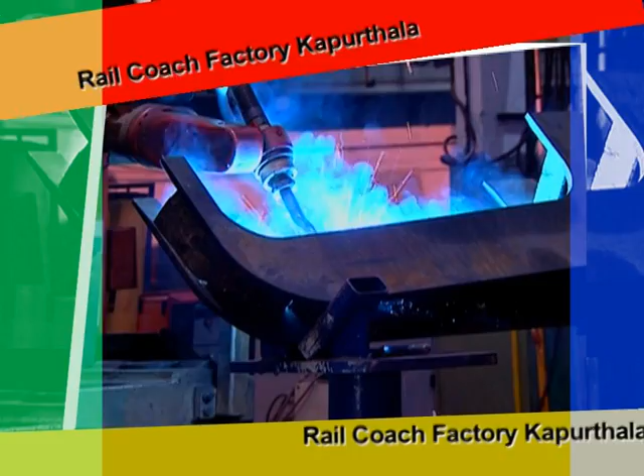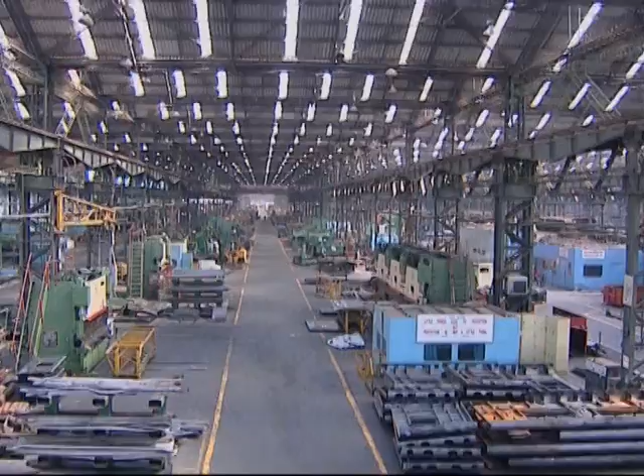This is Rail Coach Factory, a production unit of Indian Railways with the capacity to manufacture 1,500 coaches of various types every year. The factory, with its township, sprawls in 1,200 acres of land, full of flowers and greenery all around at Kapurthala in Punjab.

It was set up in 1986 with the objective of meeting the ever-increasing demand for rail transportation in India and to provide employment opportunities in this industrially backward area. Besides that, Indian Railways intended to upgrade its technology to contemporary world standards.

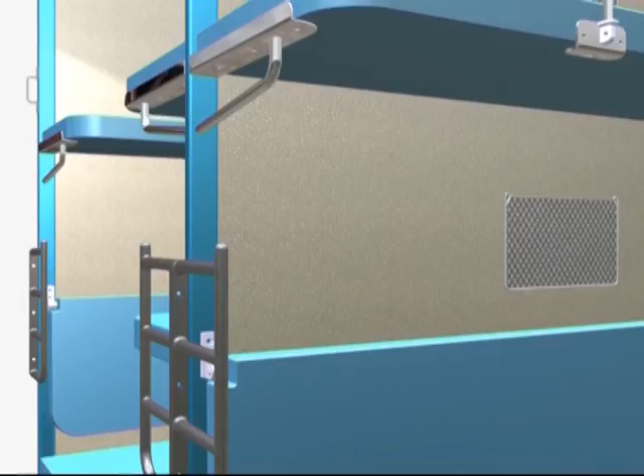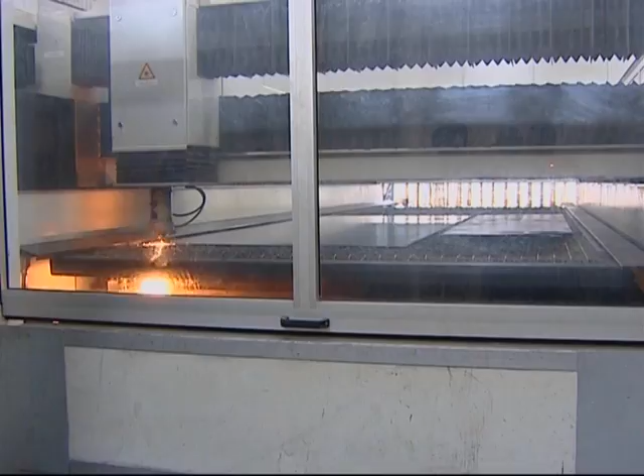For this, Indian Railways entered into a contract with Alstom LHB Germany. Rail Coach Factory had undertaken the task of developing and manufacturing modern high-speed railway carriages under this agreement, which envisaged transfer of technology in design, manufacture and maintenance engineering. As a result of world-class technology, Rail Coach Factory has transformed Indian Railways by introducing modern, high-speed, lightweight coaches.

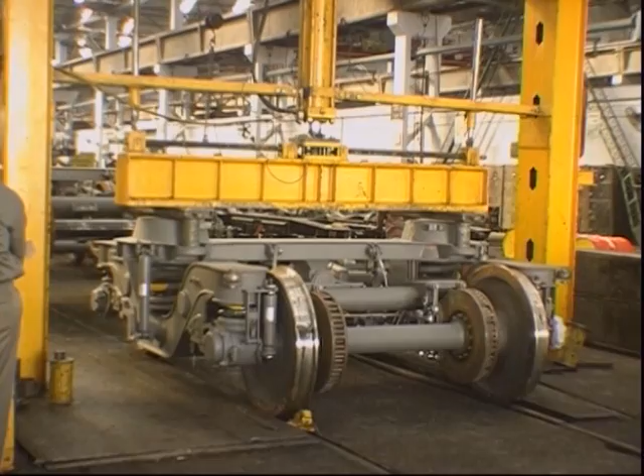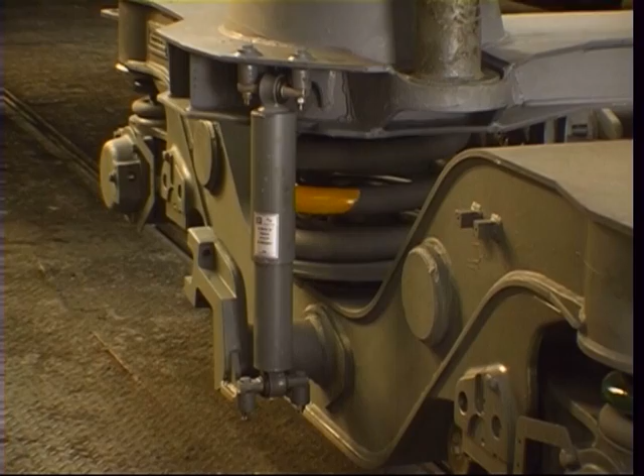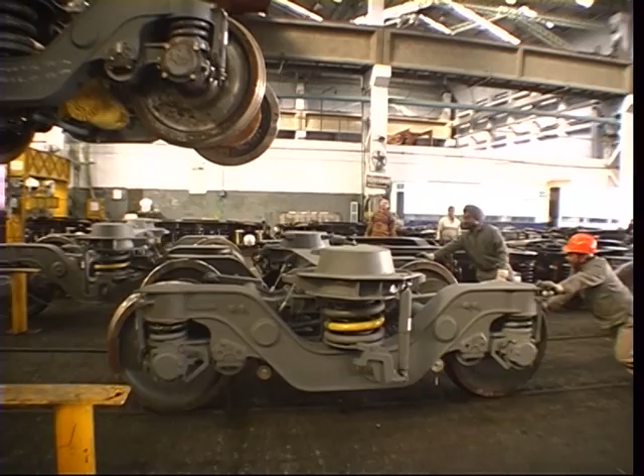Bogie design is key to high speed and ride comfort of coaches. Bogies of Fiat design from Switzerland are now being manufactured at Rail Coach Factory. These have been designed for a test speed of 180 km per hour and can be upgraded for a speed of 200 km with minor modifications. Rail Coach Factory now has capabilities to make Eurofima-designed bogies as per international standards.

The new design coaches are being used for high-end Rajdhani and Shatabdi trains of Indian Railways. The attractive and appealing exterior design sets new standards.

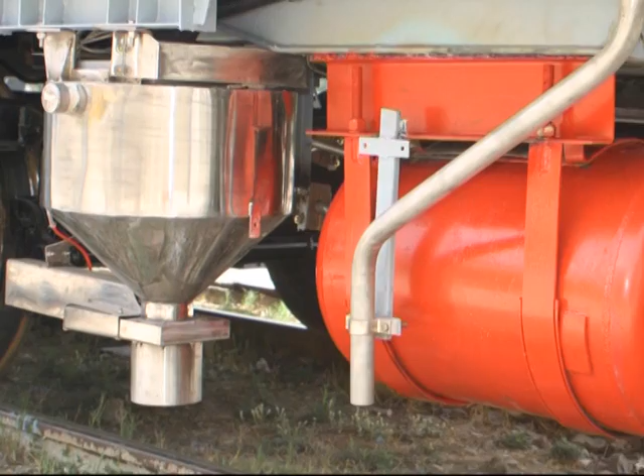Rajdhani trains are provided with air-conditioned first-class, 2-tier sleeper, 3-tier sleeper, hot buffet coach and generator cars, whereas Shatabdi trains have chair car configuration. Superior features of these coaches are higher carrying capacity, reduction in weight, higher speed, superior ride quality, sound insulation, AC humidity control, and a controlled discharge toilet system which opens up only when the trains pick up a certain speed, so that tracks on stations remain clean.

Rail Coach Factory Kapurthala has a strong tradition of innovations and developing new products.

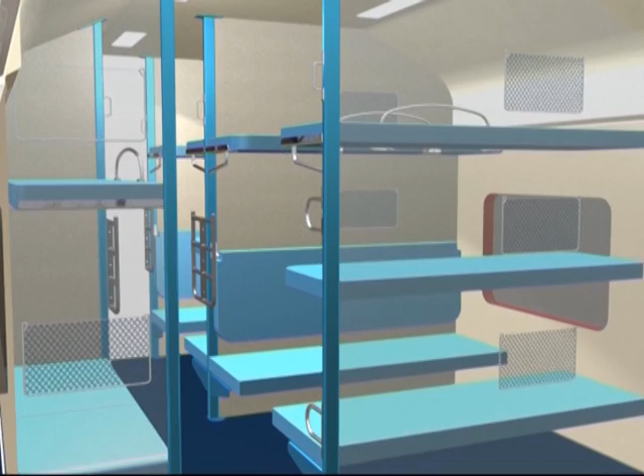Many new developments on coaching stock have taken place in Rail Coach Factory, such as AC 3-tier coaches for the benefit of long-distance passengers at a lower cost, and roof-mounted AC package units which are more efficient, reliable and easy to maintain. In order to bring AC travel within the reach of the common man, fully AC sleeper trains with higher capacity have been introduced, reducing the travel cost by another 40%.

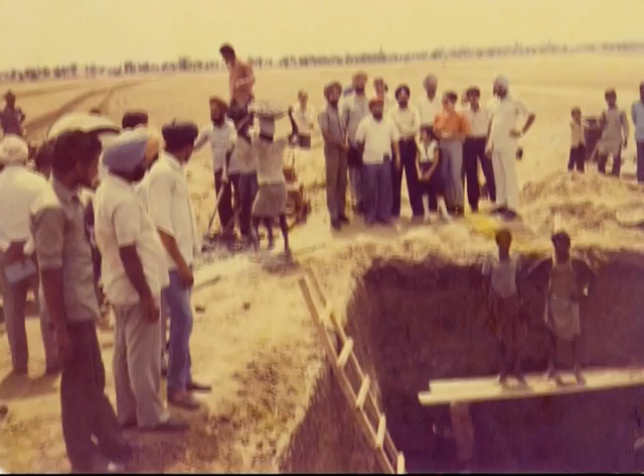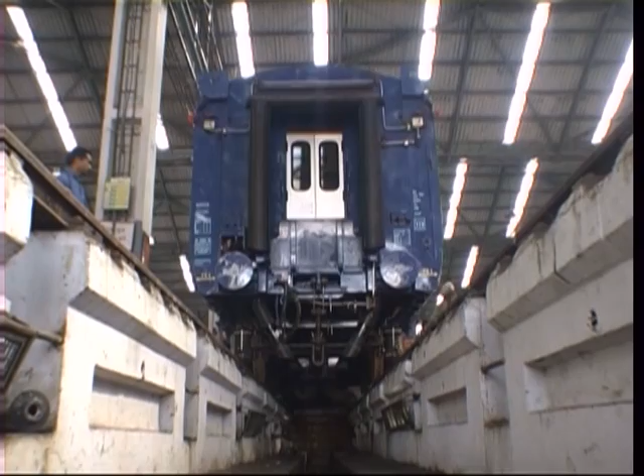The foundation stone for the coach factory at Kapurthala was laid on 17th August 1985. Within 2 years, manufacture of coaches started and the first coach was rolled out on 31st of March 1988. In 2 decades, Rail Coach Factory has made a niche in the industry and served the Indian Railways by meeting more than the desired objectives.

Half of the 40,000 coaches running on Indian Railways have been turned out from Rail Coach Factory, establishing it as one of the largest coach manufacturing units of the world.

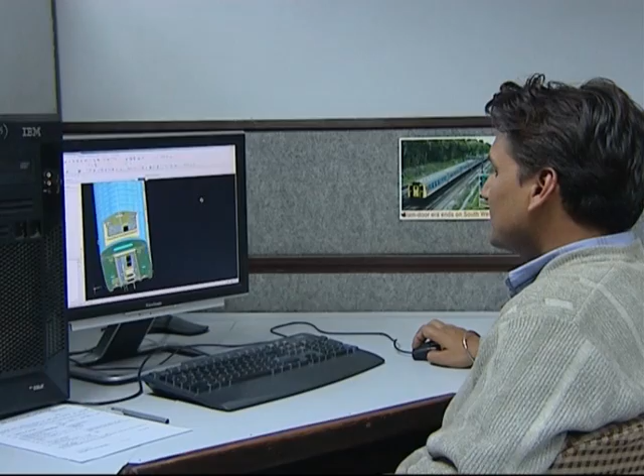The innovations at Rail Coach Factory are undertaken at the Advanced Computer Aided Design Center. Rail Coach Factory has developed into a center of excellence in design and development. The new designs undergo FEM analysis, study of vehicle dynamics, and lots of simulations before taking a physical shape.

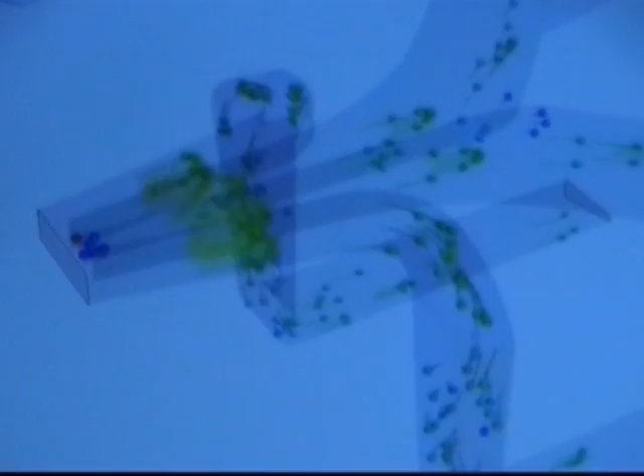Thrust is directed towards cost reduction, improvement in passenger amenities, comfort, safety of operations, and reliability of equipment. Aesthetics form an integral part of all new designs, which is perceived using advanced rendering software.

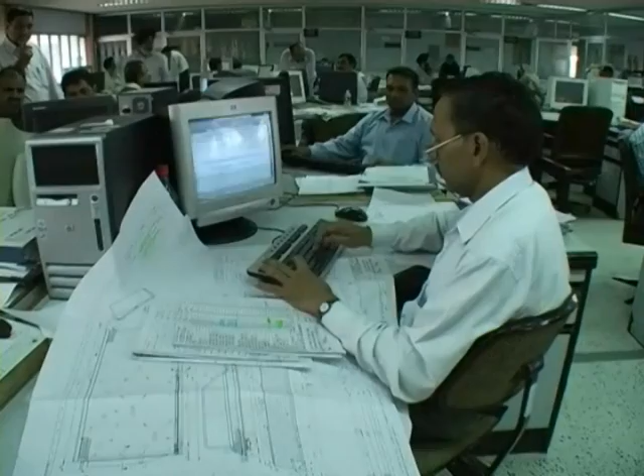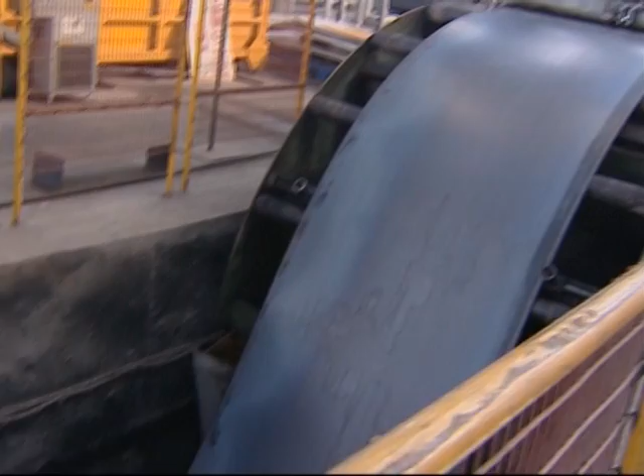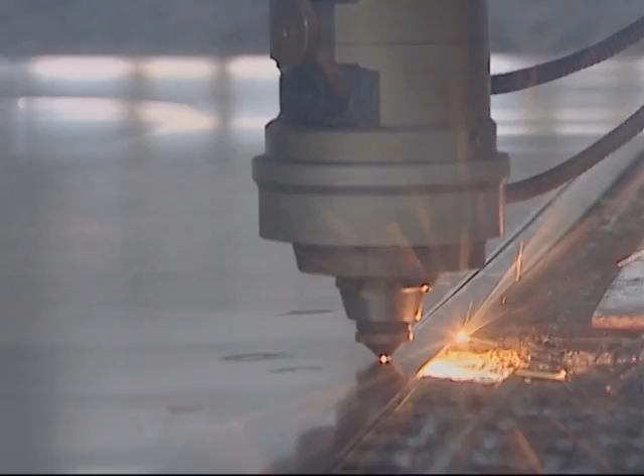After finalizing, the designs are sent for process planning and procurement of quality components. Raw material, which comes in the shape of coils, is converted into sheets on cut-to-length line and shearing center. The sheets are sent for profile cutting on laser and plasma profile cutting machines. 1,000-ton hydraulic presses and liner press brakes of various capacities are installed to manufacture window blanking, car line, etc.

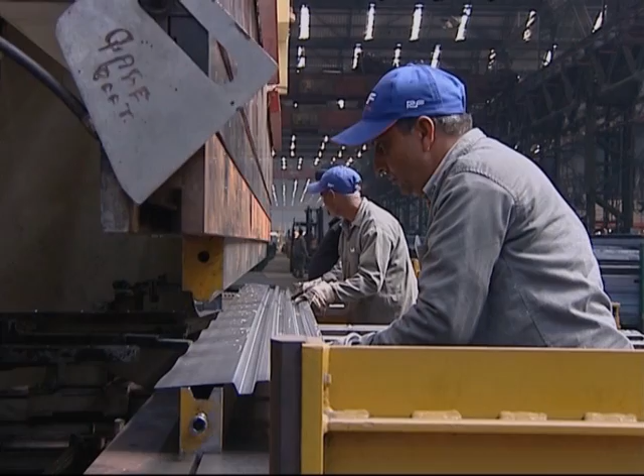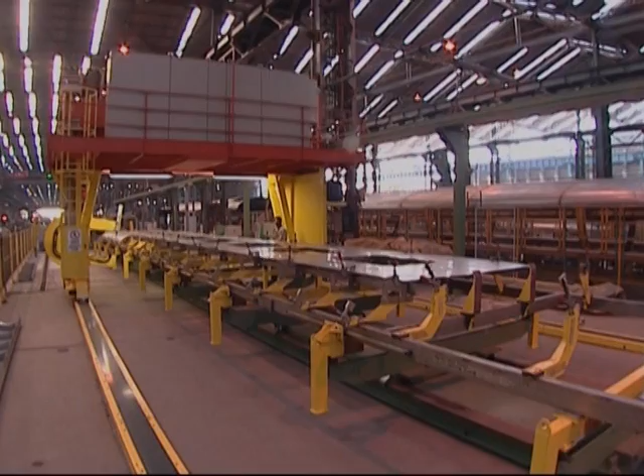Laser cutting and welding machines are used for manufacturing of side walls, followed by robotic spot welding.

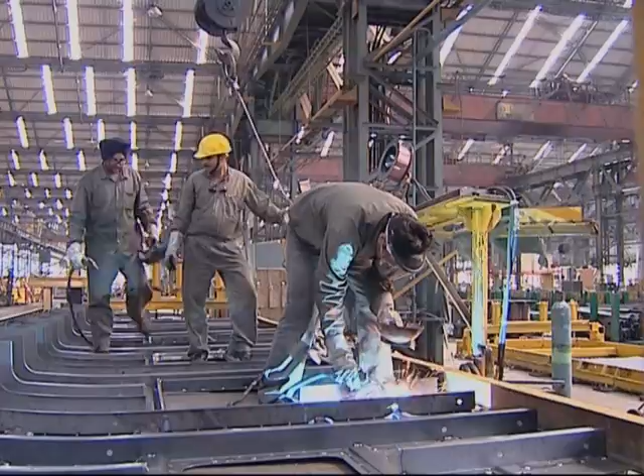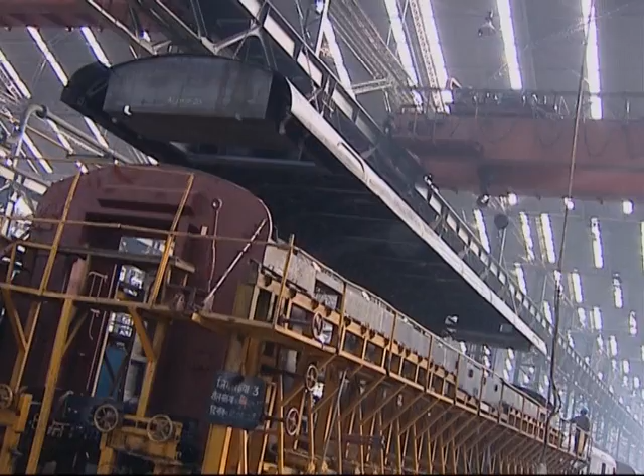The coach shell is assembled on the shell jig, and complete manufacture of the shell, right from raw material to coach shell, is under one roof, about one kilometer long.

The shells undergo a skin tensioning process to make the surface free of wrinkles before sending for painting. There is smooth and fast flow of the production process.

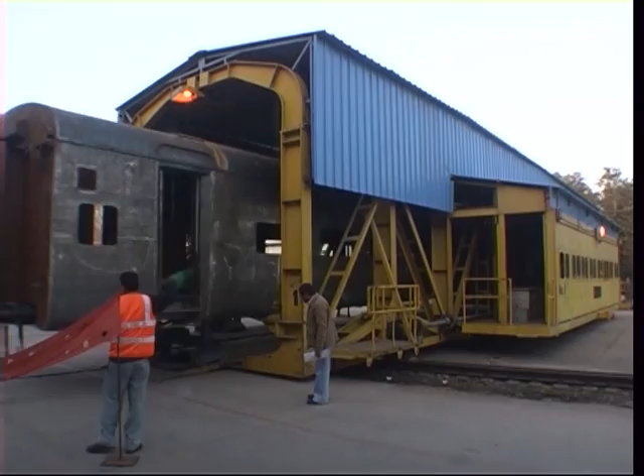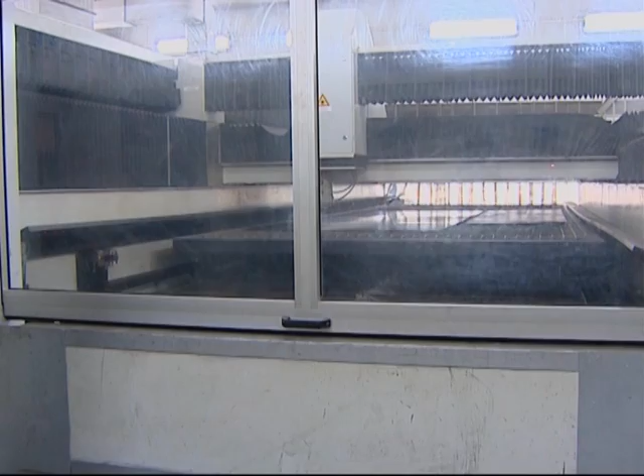Rail Coach Factory has a large machine shop with a number of CNC machining centers to carry out all types of sophisticated machining jobs required for components and assemblies.

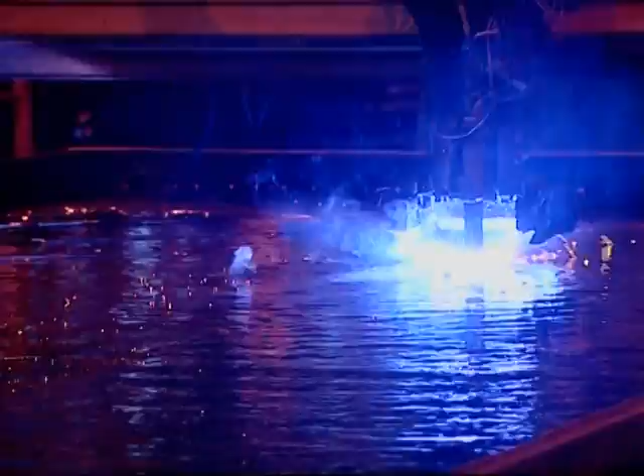Bogies are manufactured by using underwater plasma cutting machines and 6-axis robotic welding machines. Utmost safety precautions are taken and welding joints are tested by radiography to detect any flaw.

Bogies are also subjected to static load testing before fitment under a coach.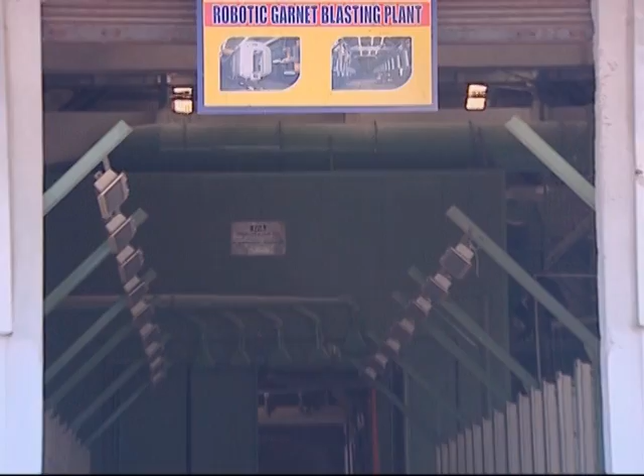The shell undergoes garnet blasting in a robotic plant for preparing them for quality painting. The cycle is completed in automated painting booths.

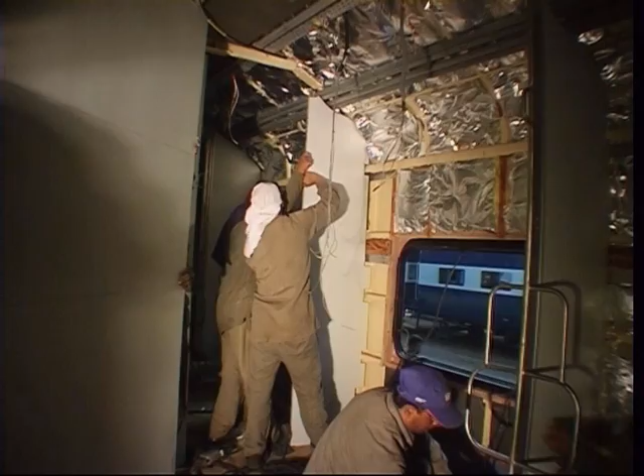A large pool of highly skilled manpower exists for all kinds of interior furnishing activities, where the coaches are furnished for all kinds of customer requirements.

All the inputs required for manufacturing the coaches undergo rigorous quality checks in its NABL accredited testing laboratory.

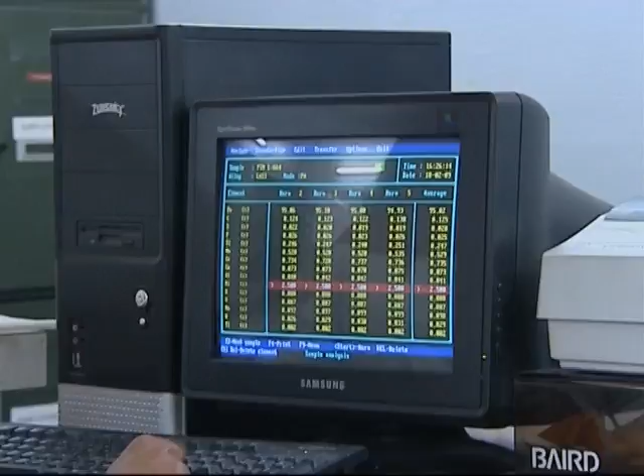The product undergoes different types of checks at different stages of manufacturing before its final testing. The final product is delivered to the customer duly certified on all the parameters.

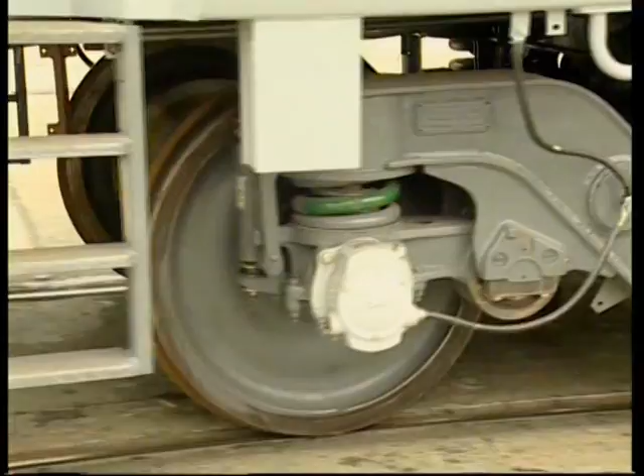Safety standards are given utmost importance and strict process control is exercised even for the suppliers of parts and sub-assemblies.

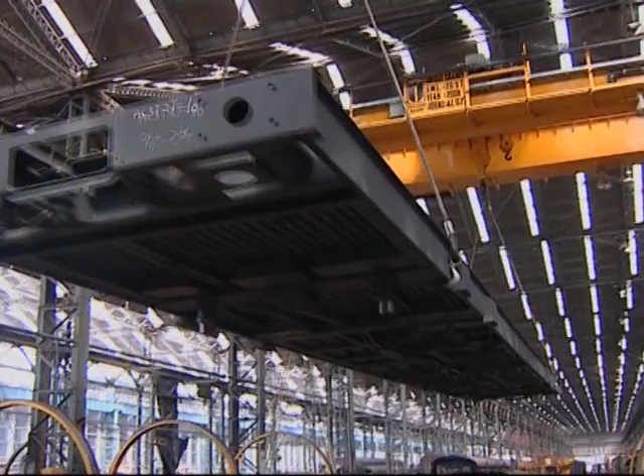Rail Coach Factory is committed to achieve excellence in design, development, manufacture, installation and commissioning of railway coaches with a view to ensure continued satisfaction at competitive costs.

Rail Coach Factory manufactures special purpose coaches as per customer requirement. The other variety of coaches manufactured by Rail Coach Factory are postal vans, high-capacity parcel vans, refrigerated vans, AC coaches for defense personnel, and many more.

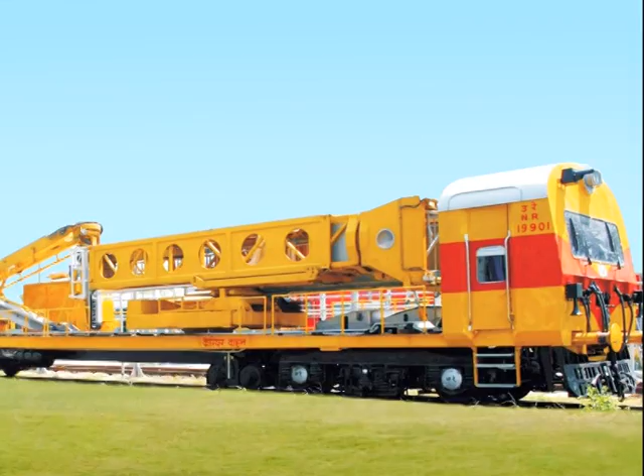Almost all coaches running in the prestigious Rajdhani and Shatabdi trains are Rail Coach Factory built and are a source of immense satisfaction to passengers.

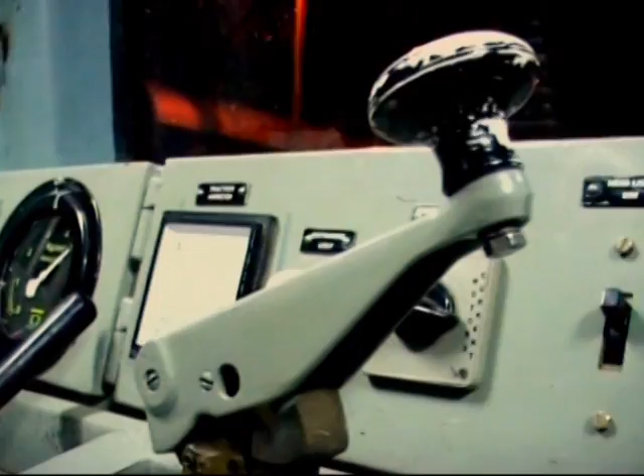Adding one more feather in its cap, Rail Coach Factory is the first one to manufacture the diesel multiple unit for meter gauge sections. Rail Coach Factory also manufactures meter gauge coaches for export, which are now running in many African and Asian countries. AC day coaches and AC sleeper coaches for Senegal, restaurant cars for Mali, chair cars for

Myanmar Railways. In addition, Rail Coach Factory has manufactured the world's largest exhibition train, furnished on different themes of science, in association with the Max Planck Society of Germany.

Kalka Shatabdi Express, I think, is one of the most comfortable journeys I feel. I travel very often up and down from Simla to Delhi, and I think even up to Kalka is very, very nice, very comfortable. And secondly, which I like most is now we are so used to it.

I find it more convenient than even air journey. I think it's very comfortable and the drive is also very good. So it's totally a good experience. The food, everything's good.

Very spacious, comfortable coach. The seats are very comfortable. It seems to be, because of the big windows, it seems to be very airy. Lots of light coming in. So definitely, the travelling is a much better experience vis-a-vis the other old coaches we were used to.

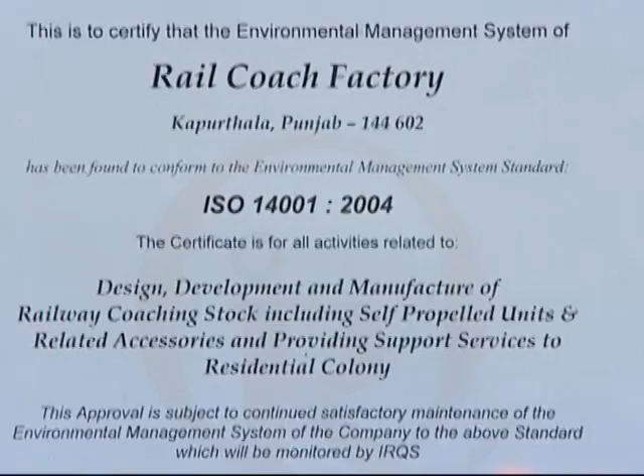Besides ISO 14001 certificate for environment management, Rail Coach Factory has been bestowed upon the Green Tech Environment Excellence Award and Golden Peacock Awards for eco-innovations in environment management through its products and processes.

Rail Coach Factory is really on the fast track. Within a short span, RCF has manufactured half of the coaches running on the Indian Railways.

RCF offers tailor-made solutions suited for any transport requirements across the globe. It has already executed various export orders for bogies, meter gauge coaches and meter gauge diesel multiple units.

Rail Coach Factory is meeting today's demands. Customers reposing their trust in RCF can be rest assured of getting the most contemporary, reliable and best value product.

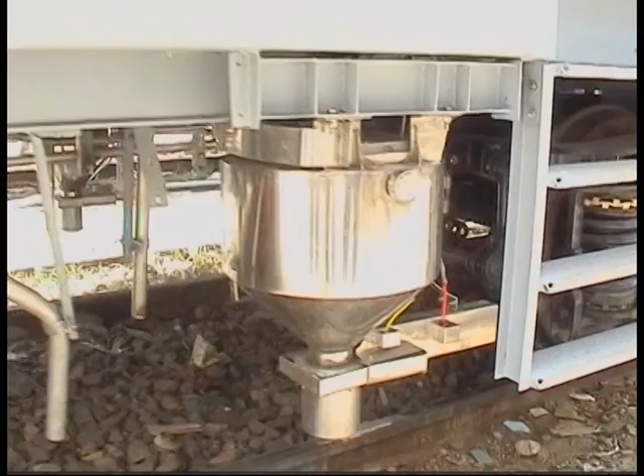It's not only futuristic, it believes in flexibility, safety and economy, and above all, the quality of its products. Rail Coach Factory will never belie your trust.